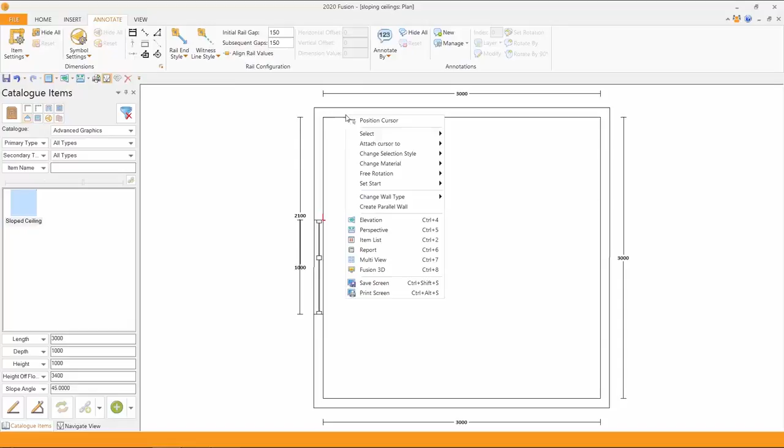If I want to move my cursor up to this top wall, right click, attach a cursor to the wall, there it is already and waiting for me. Sloping ceilings are actually found here, with that small little symbol indicating sloping ceilings.

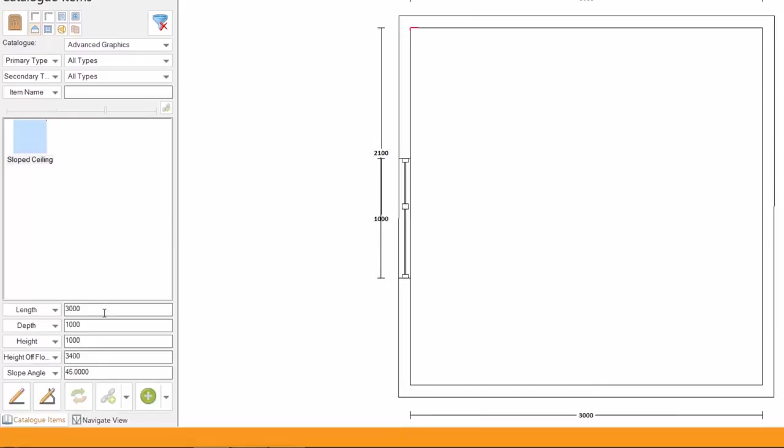It's governed by these rules down here, how long it's going to be. It's got a default of 3 meters, could be longer or shorter, a depth of 1 meter, a height of 1 meter. But this is the all important part: we need to be lower than the height of the wall. So this is going to be a 1 meter slope, and I have a 2.5 meter ceiling, so I'm going to make this one 1500.

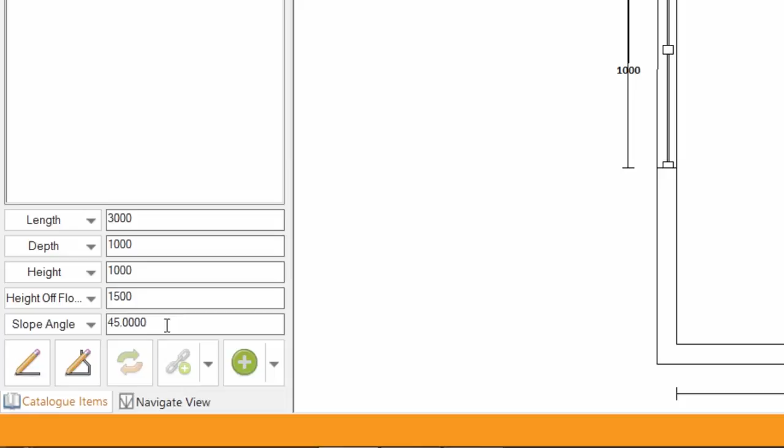I'll show you a couple of options in here, but slope angle I'll leave as it is, and I simply press add. As you can see, there's my sloping ceiling.

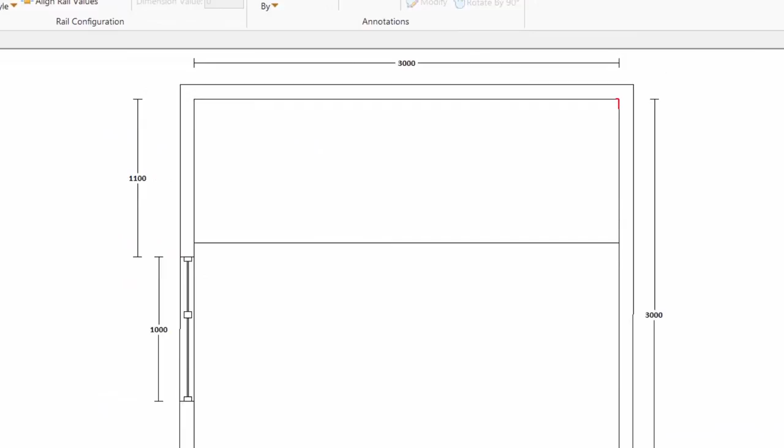The cursor's moved itself along, so if I reattach my cursor to this wall, it turns round in a clockwise direction. I can add a second and immediately you'll see that they join up. That's the magic and the power of Fusion.

If I show you an easy perspective, there they are joined. Let's render them so you can see them easily. And there they are. Now of course they will take on the color of the ceiling, and you can see that slope ceiling has taken on the color of the ceiling.

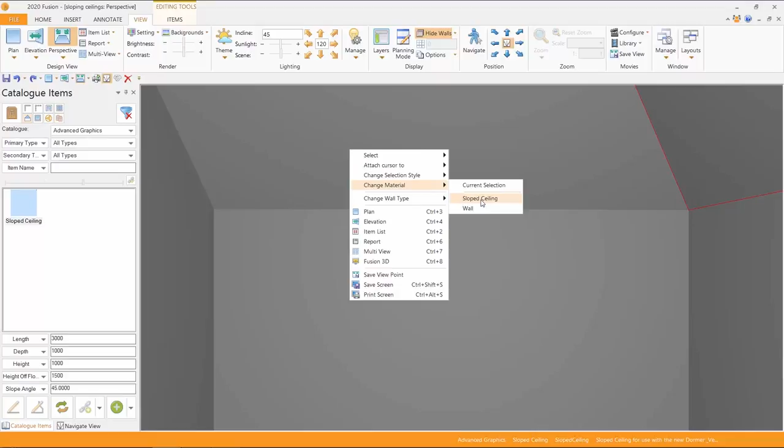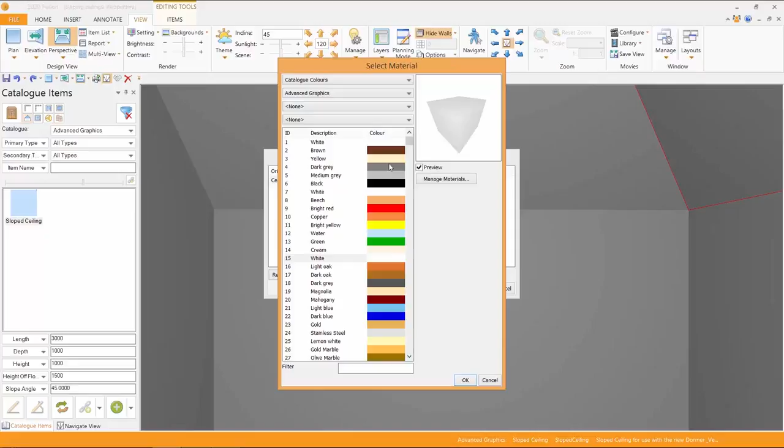If I simply come in here and say to it slope ceiling, choosing to replace it, perhaps I could come in here and select catalogs, and let's go and have a look at perhaps in here some paint. I'm just going to choose a very easy color to assess. We'll choose a yellow and select OK, so that you can see now that the ceiling has changed in its color, and we could have done that to the second one as well if we had wanted to.

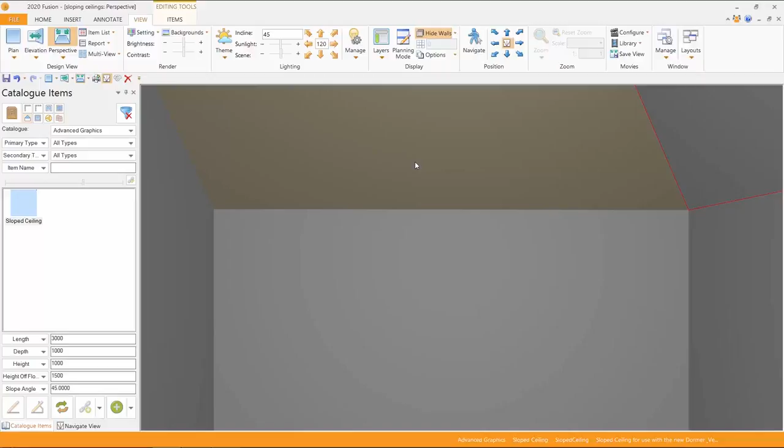However, colors can be changed, textures can be changed as well. But if I want to show you what the possibilities are in here, I'm going to delete that one, and secondly this one. Well, if I were to perhaps now add a window into this top wall, let's make it a meter, and I'm simply going to slide it into the wall there.

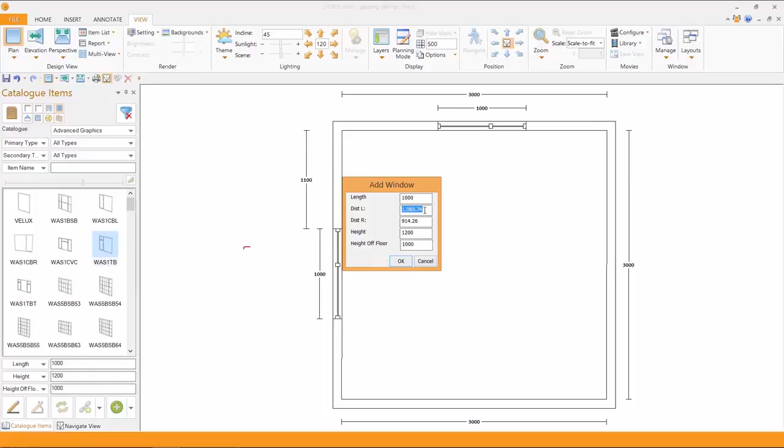I can adjust it one way or the other. Let's centralize it up. Let's make it a meter both ways.

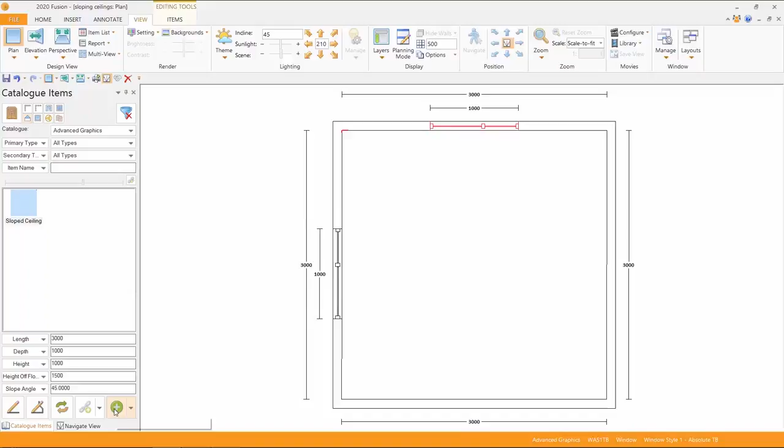I go back to the sloping ceiling tool, and again you'll notice it's resorted back, so I'm going to change that to 1500. What I need to do is re-anchor my cursor back to the beginning of the wall, and when I press the add button, on it goes. But you can see it's got a strange and peculiar shape.

Let's go and have a look what it does in perspective. So from one area to another, it actually cuts itself around the window. Isn't that fantastic? We could have made a small slope and a second small slope either side, but simply making one slope all the way across allows that to happen very easily.

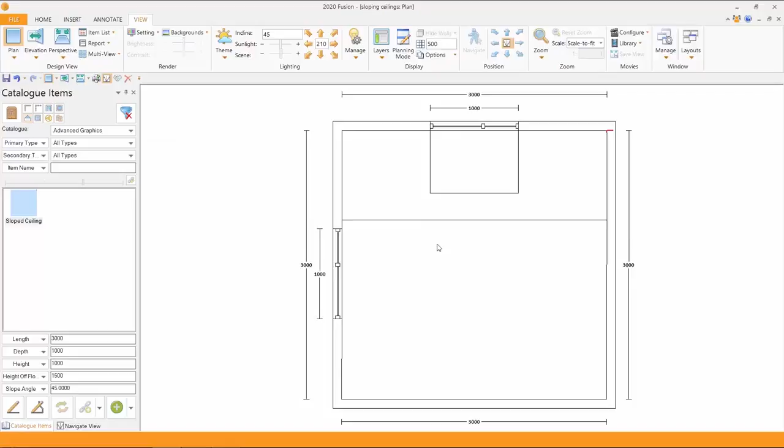Well, let's see what else we can do. If I were to remove that window, just pressing delete, and I'm going to go back now and delete that slope as well. I want to experiment in here.

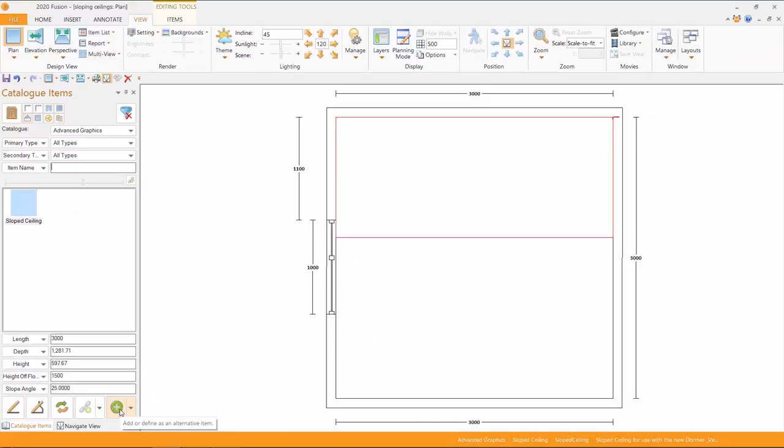If I wanted, say, a 25-degree angle and added that slope in here, there I'm going to add that. You can see it's penetrating deeper into the room.

So if we again look at the perspective, readjusting itself, a much shallower angle, and it's set there off the height off the floor, and the height off the floor is 1500.

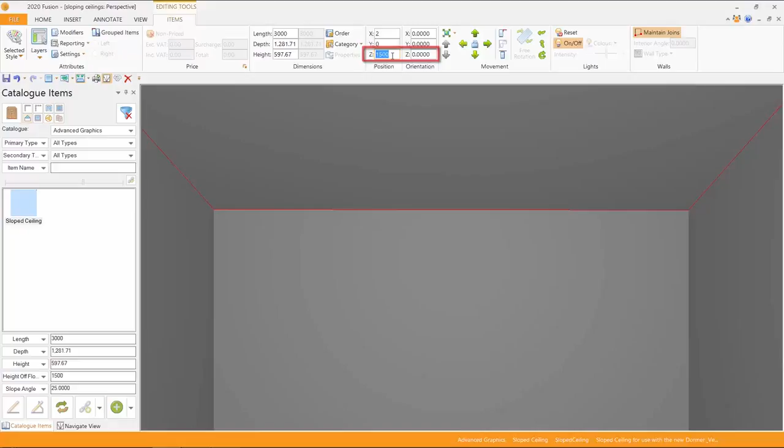Well, we could go in there and alter that at any time, because Z just here is the height off the floor. So if I were to make that 1 meter and press enter, notice what happens to the slope. It is now much shallower.

We can do just about anything and everything with a sloping ceiling. It really is a nice way to work. Do look out for further masterclasses, there are lots of them. And do look out for the subject of Velux roof lights, and you'll see how we then include that into the sloping ceiling.